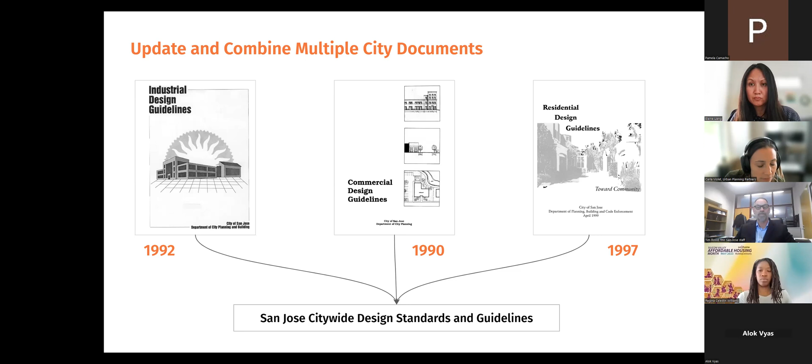I'm going to jump in and give a bit more context behind the need for cities to adopt objective design standards. To address the housing shortage, the state introduced two bills that many of you may already be familiar with. The first was Senate Bill 35, the Affordable Housing Streamlined Approval, which aimed to increase housing supply by requiring cities to streamline their approvals for certain types of projects.

Eligible housing projects were required to meet a range of criteria, which included meeting objective design standards in place at the time of submittal for application. The second bill was Senate Bill 330, the Housing Crisis Act of 2019.

The goal behind this bill was to provide a more predictable development process and speed up that review process for new housing, and also to preserve existing affordable housing and prevent downzoning or other types of actions that could potentially reduce housing supply. So if a project is consistent with objective standards, a city would not be able to reduce the density or deny the project unless certain findings were met. Next slide, please.

So what exactly are objective design standards? Design standards are objective if they are measurable, verifiable, and knowable to all parties prior to project submittal. And the review process should not involve any personal or subjective judgment.

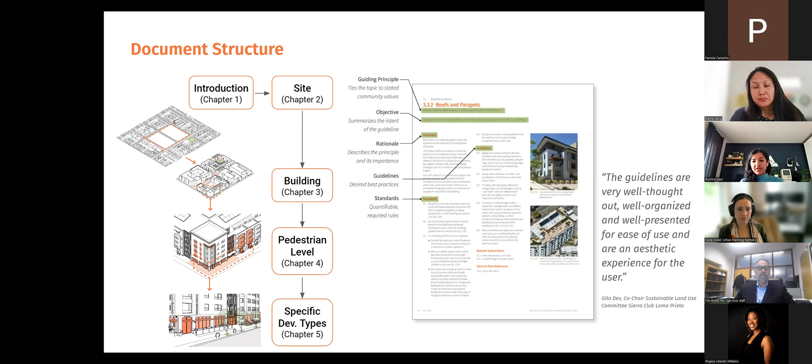So in this document, what we did is we started from a bigger picture, looking at the site and its context, and then diving deeper into building design and the finer grained pedestrian level treatments to maintain a pleasant environment.

We designed this document to be very user-friendly so that anyone from any kind of design level experience can follow through. We started looking at this with a few key design principles that are applicable to all kinds of building types. Site planning and organization is the first and foremost.

It is very crucial to understand the context of a site, where it's located, its surroundings, its local infrastructure, its relationship to transit. So the way we created these standards is to require locating primary building entrances close to frequent transit stops, which would promote an active lifestyle and focus on bikes and pedestrian access. It would also require the bicycle and pedestrian entries in the site and development to be located so that they can avoid intersecting or getting interrupted by vehicular traffic.

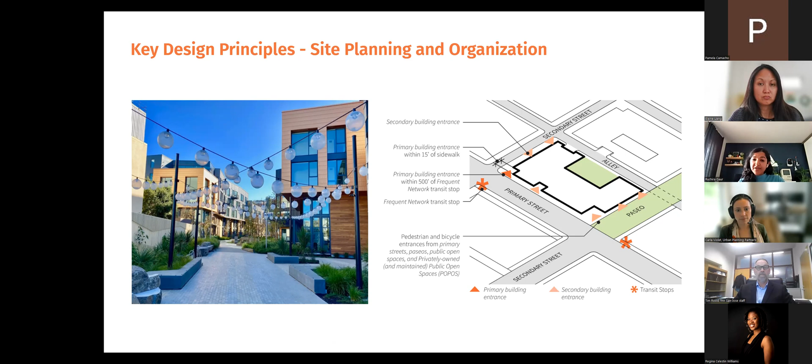The other key design principle we looked at was parking and the location and treatment of parking. Parking is a necessary evil. It is important, we all know that, but it's also notorious for negatively impacting the pedestrian realm, and it creates sort of unsafe places for people to walk around in the city. So we require buildings to be oriented along the street and parking to be located behind the buildings or concealed by wrapping it with residential and commercial uses. If you don't get this right, it doesn't matter so much what the building looks like. The building might look great, but it's going to fail the urban fabric, the city fabric, and the comfort a pedestrian might have walking around in the city.

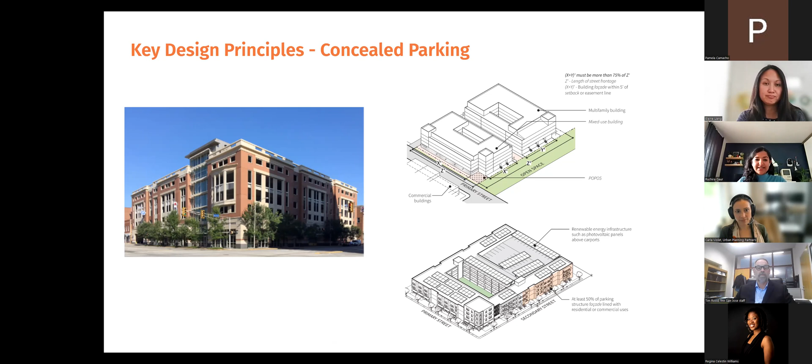The other design principle, which connects to the previous one, is that we wanted to have active frontages and transparency along the ground floor, again to promote an active lifestyle and more pedestrian activity in the streets of San Jose.

The standards require a considerable portion of the ground floor to be lined with active frontages, such as building lobbies, common areas, fitness rooms, all along the street. They also require minimizing blank walls to help convert uninviting spaces into safer places that pedestrians would feel comfortable walking through. In addition to locating active uses along the street, it's also important to create transparent building facades at that level so it's easy to create an engaging street where pedestrians can see the activities happening inside the building, especially for retail and commercial purposes.

For residential development, this would mean providing common areas with large transparent windows so there's an indoor-outdoor relationship for building occupants, and pedestrians can look inside and see what fun activities are happening. We also look at providing ground floor residential units. They wouldn't have as many transparent windows, but they would have stoops and frequent entrances, which would help create eyes on the street, again creating a more inviting and comfortable environment for people to walk by and more engaging streets.

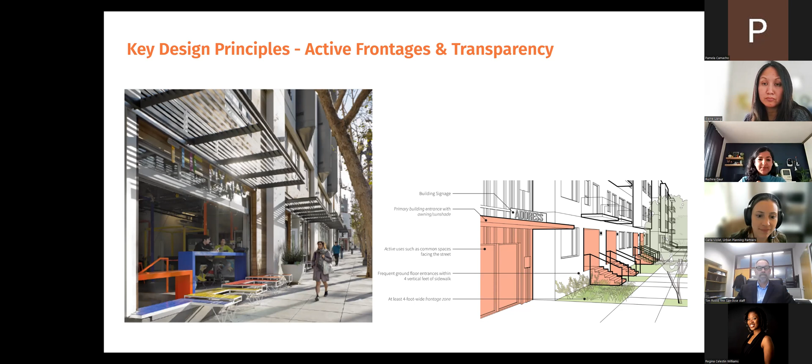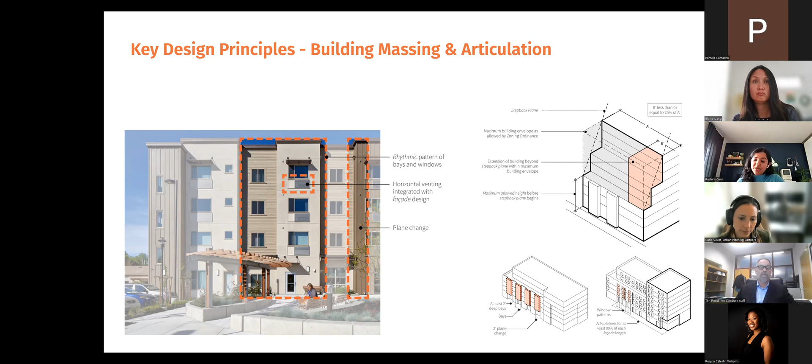Then we started looking at building massing and articulation. We wanted to make sure new buildings still respect existing buildings, even existing low density developments, and the massing needed to respond to that. The zoning might allow a larger building envelope, but design is where we start looking at building articulation, having bays, window patterns and material changes, and how the ground floor is treated, so that it looks more inviting for building inhabitants and also passersby.

Last but not least, we also focused on sustainability and how future developments would respond to climate change. We have standards and guidelines for how to design open spaces, such as POPOS, privately owned public open spaces, paseos, and common open spaces. We also have standards regarding stormwater retention and use of low impact development techniques to preserve water for landscaping and use it in the most efficient way possible.

In addition, we talk about building orientation, shading devices such as awnings and sunshades, and how much they should shade the building and windows with clear glazing to reduce solar heat gain. We also discuss roof treatment and the treatment of surface parking areas to reduce the urban heat island effect, making sure our landscaping is able to shade most of it, in turn reducing solar heat gain and making our developments more energy efficient.

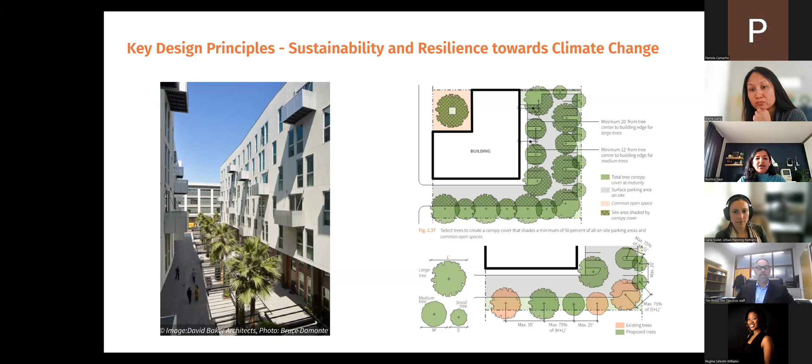We wanted to make sure this works with state requirements of energy efficiency as well, so we had to keep all of that in mind. We also included prototypes for each building typology the city has or would want to have in the future, focusing on residential, commercial, and industrial typologies since we were combining all three documents, as Tim mentioned at the beginning.

We discussed missing middle and conversion of existing single family houses to duplexes, going all the way up to sixplexes, changing the use of these buildings from residential to commercial, and what design standards and guidelines should be followed or kept in mind while doing so.

In illustrating these prototypes, we provide references throughout the document related to the most important design elements. While creating these diagrams and examples, we made sure to remove style from the equation—as I mentioned earlier, you can have the same design elements in a very traditional style or a very contemporary style. That made us focus on what is fundamentally important.

All the key design principles we discussed are the fundamentally important design elements: prioritizing site planning, building entrances, massing and articulation, and street frontage, active spaces, and transparency. If we're able to address those, it doesn't matter so much about anything else—everything falls into place. And the prototypes are not new standards that only apply to one particular building typology.

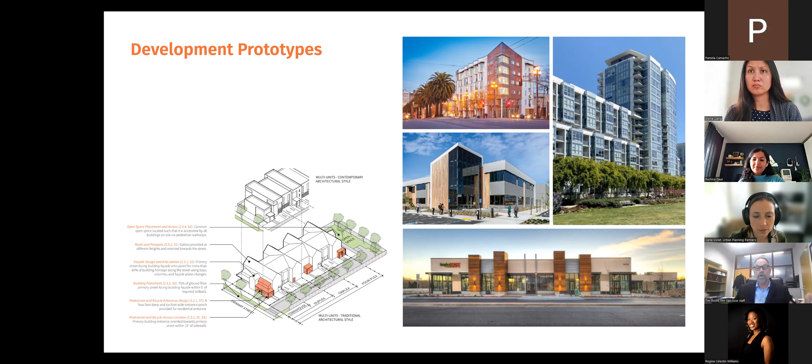I saw a question in the chat about this—that's one of the ways we were able to try to provide good guidance for so many different conditions and uses. The kind staff at San Jose Department of Planning, Building, Code Enforcement, in the Development Review Group, were kind enough to provide some examples of either recently approved or projects under review under the citywide guidelines.

I don't know a lot about these specific projects—I left the city over a year ago, but I see Cora McNaughton, who used to be on one of the teams that reported up to me, is here, so we'll do our best to answer questions about these specific projects. We mostly just wanted to give you a flavor of what kinds of things are coming in and being evaluated.

It might require office uses on the second or third floor, so those types of multiple mixed-use buildings are challenging to finance, construct, and operate. But that's what the urban village strategy calls for, because San Jose, being the largest bedroom community—certainly the bedroom community of Silicon Valley—has been really creative about trying to find ways to maintain its job base while adding housing and improve its jobs-to-housing ratio.

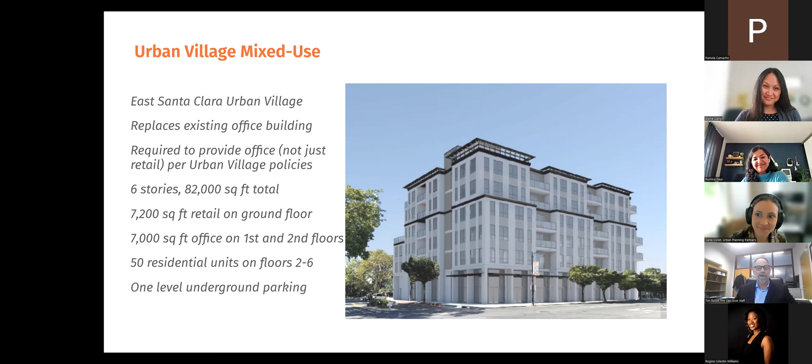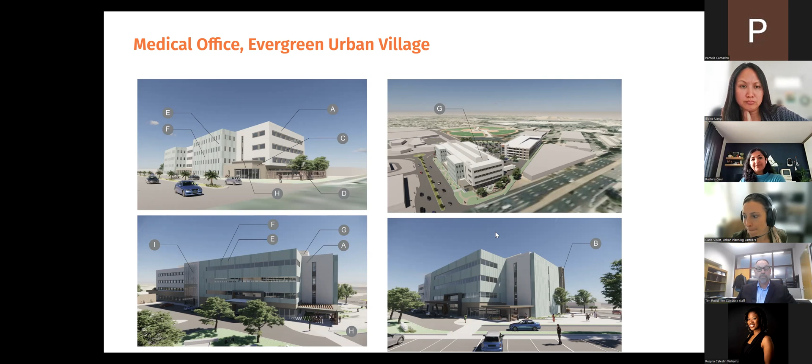So, to circle back to affordable housing, these guidelines cover the entire city. They cover all forms of residential, outside of downtown, which has its own document, covering both affordable and market rate housing.

We talked a bit about the specific guidance for the missing middle housing types. That's aimed at upping the quality of, and minimizing the neighborhood impacts of, those missing middle forms of housing that are potentially more naturally affordable — naturally occurring affordable housing — as opposed to tax credit, capital A affordable housing.